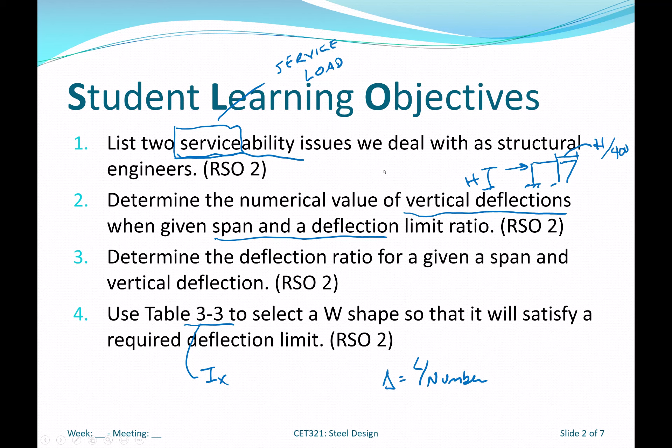So, everything goes back to deflection being span over a number, okay? As I've said a number of times, the best way to communicate deflection is in terms of a ratio, not so much the actual value. So we'll review that, and then we'll also review table 3-3 in the steel manual, which is what we call the Ix table. It's various wide flange shapes ordered in increasing moment of inertia values so that you can efficiently select a beam size that has a moment of inertia greater than what you need to satisfy your deflection.

Okay. Again, serviceability is the second condition that we have to meet in addition to strength. Everything we've talked about so far, nominal moment, nominal shear, nominal axial strength, has all been strength values. We're now looking at serviceability, and again, primarily vertical deflection. We do have vibration issues.

There's plenty of research out there that tries to establish how to get vibration into acceptable levels that are tolerable by human occupants. Sitting in an office in a high rise somewhere, you may experience vibration every once in a while. Sitting on the Market Street Bridge, waiting for the light to change, heading north to campus, that bridge definitely vibrates quite a bit. I don't know if it's within acceptable tolerances. I'm assuming it is. But what bothers me personally from a vibration standpoint may be different than what bothers another person. So it's a tough one to convince somebody what you're experiencing is within acceptable tolerances.

Okay. Deflection certainly has an impact on interior finishes, doors and windows, or even plastered ceilings. Has anybody ever seen a plastered ceiling? You might in some historical facilities, but I doubt many of the buildings we use day to day have plastered ceilings. But if things deflect too much or drift too much, you could crack walls, drywall, you could crack tile on the floor, you could crack windows.

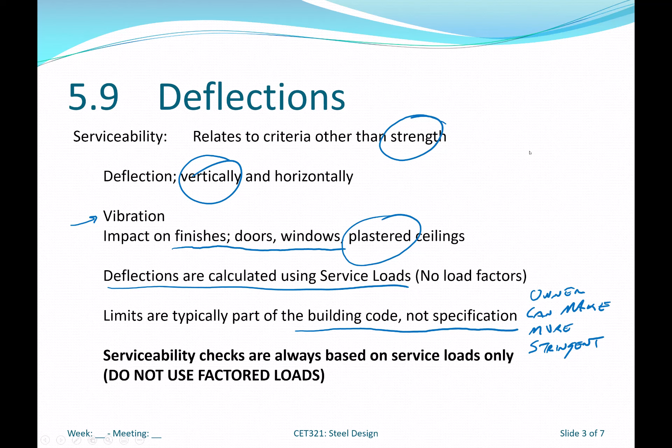Okay. All right. So again, just a reminder, limits are typically part of the building code, not the AISC specification. And remember, owners can override. They can make more stringent serviceability conditions, right? So you have to meet the minimum according to ASCE 7, but an owner could say, "Hey, I want less vibration or less deflection." Okay. All right, so here we are.

Deflection, pretty common loading, uniformly distributed load, 5WL^4/384EI. Okay. And this equation comes from the AISC manual. So you see here is our 5WL^4/384EI for delta max at center, and typically deflection is going to be maximum near the center of the span. Another one that you use quite often would be concentrated load at the middle, PL^3/48EI.

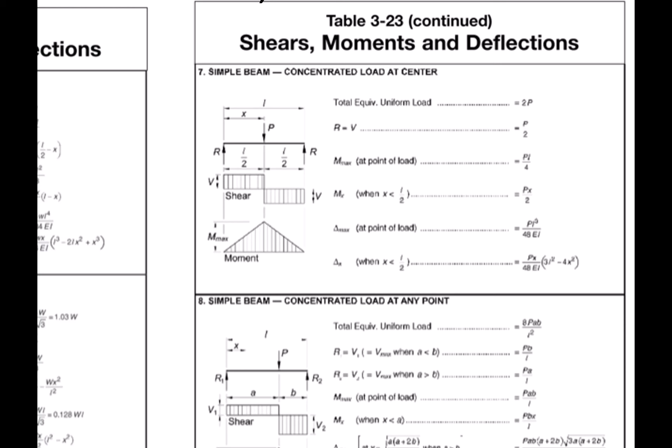Again, you got to use your judgment. If my load isn't at the center line, maybe I just put it at the center line for my deflection check. If it doesn't control, I'm good. If it starts to look like it's controlling, then maybe you want to do a more accurate analysis. But sometimes you take those shortcuts, if you will.

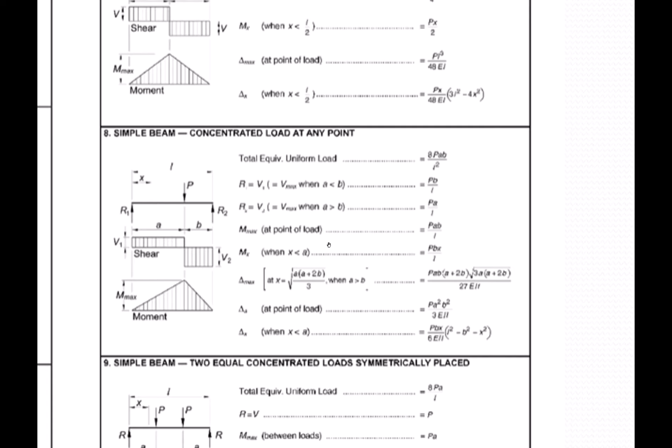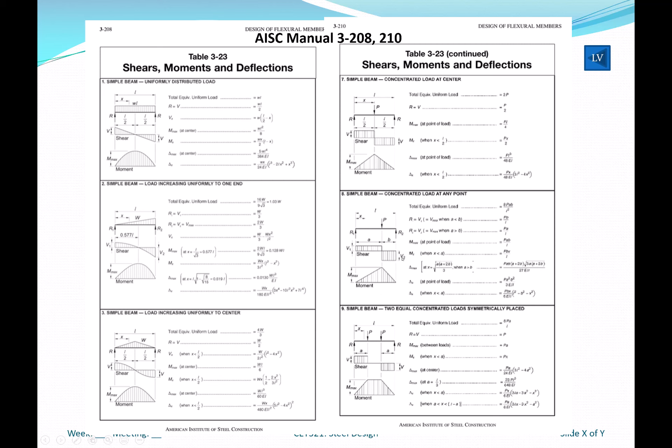If you have this condition, if you look here at this, delta max is a much more involved formula, but is it worth it if this delta max is satisfied? If you check PL^3/48EI and it works, why worry about the actual deflection? Okay. So again, these types of things we can calculate, right?

So again, this is a loading diagram I grabbed out of the textbook, has a uniform load. Again, it doesn't tell me what type of loading it is, right? It doesn't tell me if it's dead, live, or a combination of it, but I know a deflection, right? I can take deflection at the center line of the uniform load. Again, it's 5WL^4/384EI.

And if I leave W and L as part of the equation, right, I know E is 29,000. And again, I know I is going to vary. So I want to keep I, W, and L as variables. Then, as my loading changes, or my beam size changes, or my span changes, I can just use this formula, right?

So again, if I take 5 times W, and remember W is typically in kips per foot, so I want to change that from kips per foot to kips per inch. I want to get 1 foot on the top, 12 inches on the bottom. Again, that's going to be the same as this conversion, okay? And then span is easy, right? L times 12 to the 4th, all over 384EI.

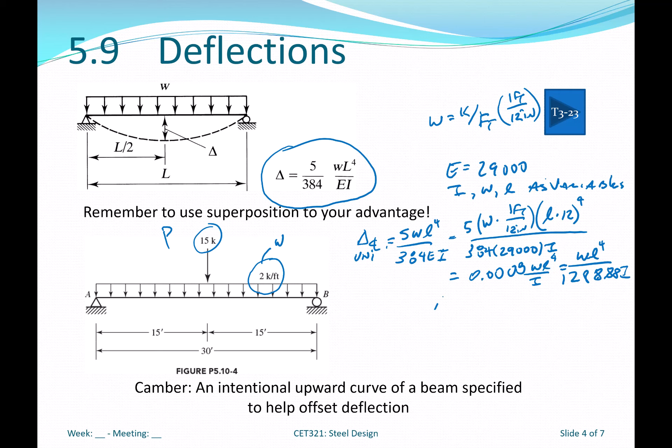So I would store this and keep this handy on a sheet or in my notes that I use for day-to-day operation. And anytime I have steel beams, because E is 29,000, subjected to uniform load, I can use WL^4/1288I. And I can do the same for my P load at the center line, right? I know that formula from the back of the book or the steel manual is PL^3/48EI.

And again, keep P and L in there, but I want to convert L to inches, and then 48, 29,000 I. And again, I end up doing it the same way, PL cubed over 805.55 I. Right, so again, anytime L or P or I changes, I can calculate that deflection due to the concentrated load at center line using PL cubed over 805.55 I. Okay, again, I'll use that as an example. I won't take time to do the example now, but that's pretty much the calculations you're going to need.

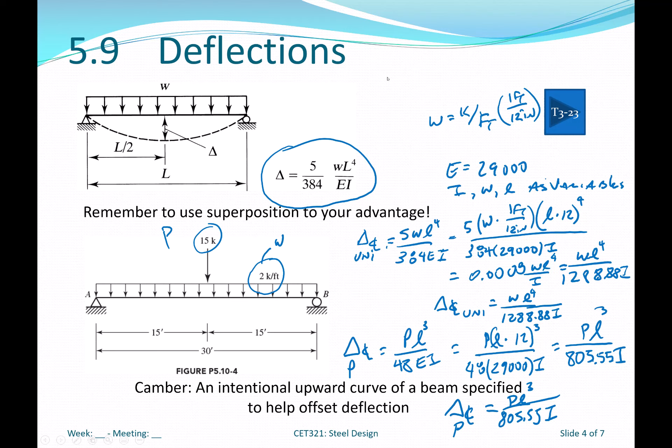And then here is dead plus live, often referred to as total load deflection if all we have is dead plus live. But that's a pretty common combination we have to check. Again, think of live, that's people, right? So when the people are in the building, that's when you want to check the deflection, because they're going to be the ones that detect it.

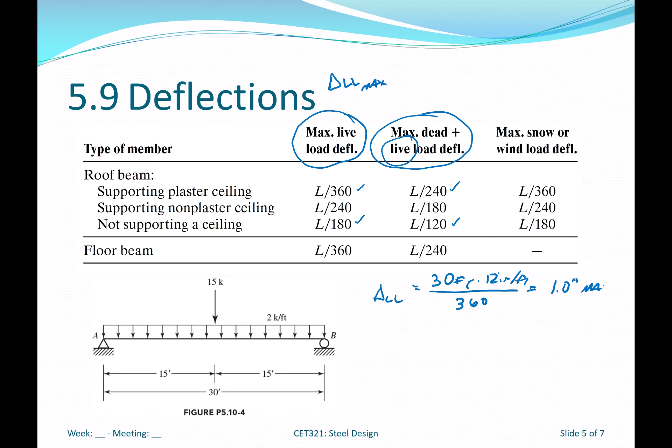Okay, so again, if we think of those limits, if I think delta live load for this case, again, it's 30 feet, so I want to change it to inches, and I divide it by 360, that means I can end up with a 1 inch max deflection for this case. If it was delta dead plus live, it would be L over 240, same process, and we end up with 1.5 inches max, okay?

So again, think about how it works. Once we put dead load on, the structure's deformed, it's not going to deform anymore. Then we impose live load on it, and so the live load would cause an additional 1 inch of deflection, but the maximum overall deflection would be the 1.5 limit, okay? So we always want to talk in terms of ratios, right? So if I have a calculated live load deflection, and it turns out to be 0.75 inches, I know that's less than 1, so therefore it's okay.

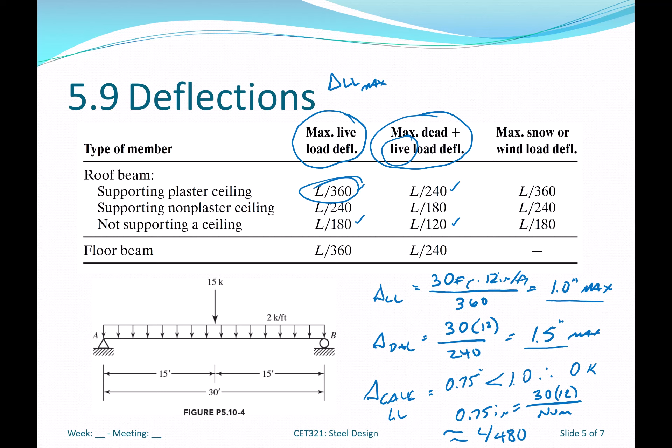But let's say I want to report that in terms of L over a number, right? I take 0.75 inches. Again, span is in feet times 12 to get in inches, and then divided by my number. So the number in this case is going to be 360 divided by 3/4. So this is equivalent to L over 480, which is definitely better than L over 360. Okay, so you've got to be familiar with that type of maneuvering of the numbers.

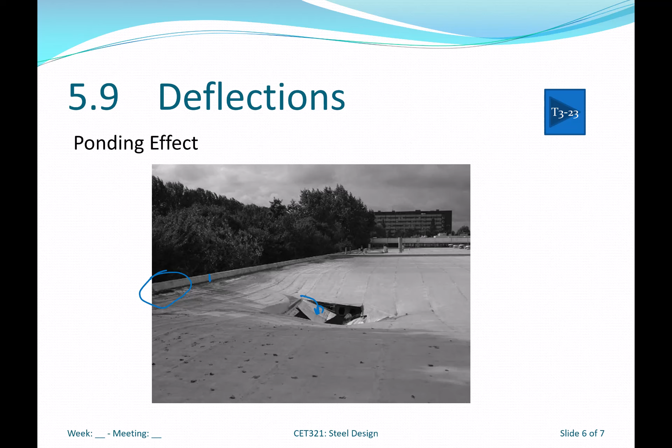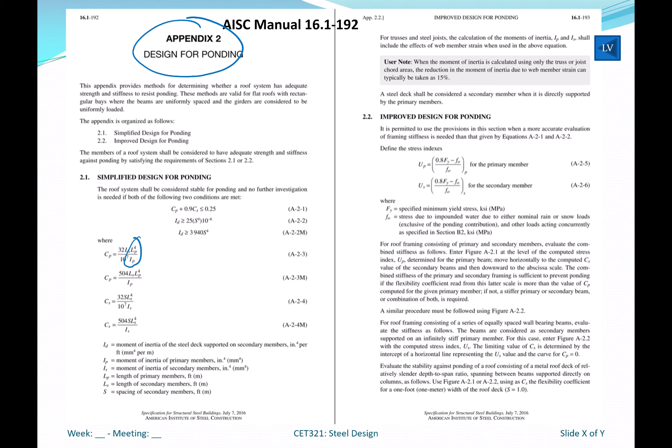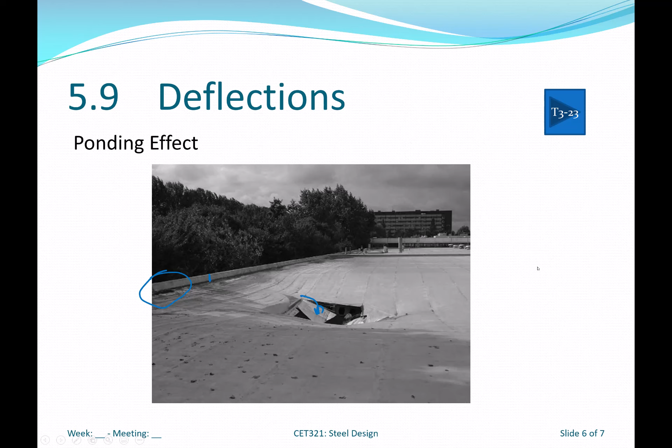Certainly, clogged drains will cause that for sure, especially when you have this parapet, right? We could potentially have a foot of water sitting on top of this thing, okay? So anyways, details. But ponding is covered in the steel manual, in the appendices, Appendix 2. Again, I'm not going to go through this in detail, but you can see it's a function of spans and moments of inertia. Okay, so again, lots to keep learning in this field. Okay, so I think that's it. I mean, there's also lots of other stuff, but I think that's enough to make you dangerous.